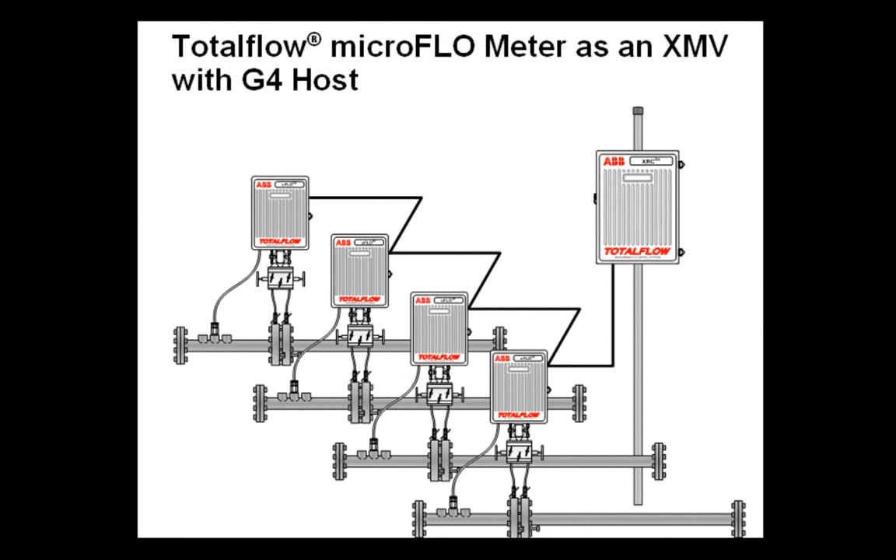Welcome to this instructional video to demonstrate the application of using the ABB microFLO as a remote transmitter, or as we call it, an XMV. In this video we're going to explore the configuration and setup of the microFLO in a multi-tube AGA3 configuration.

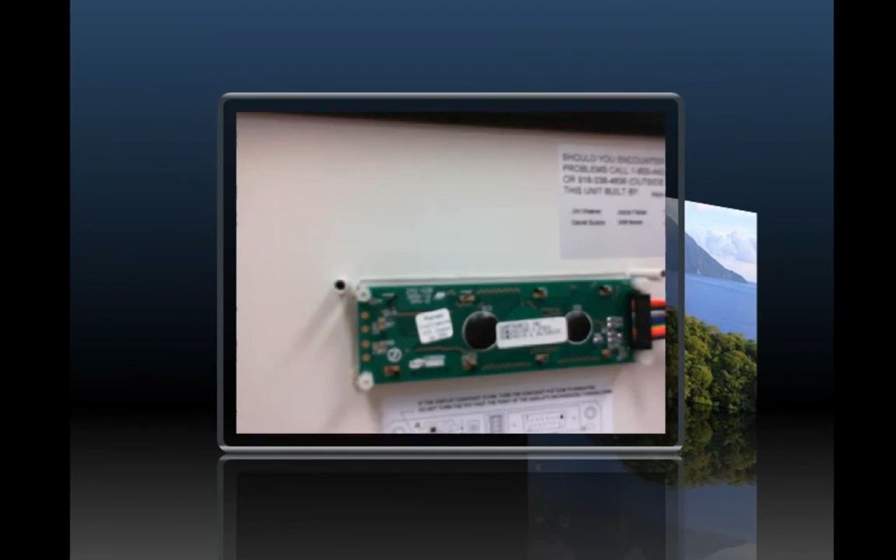Let's take a quick look at an overview of the microFLO hardware. As we open the case, we have a display connected with a ribbon cable to the main board. On the main board we have a daughter card, which can be either RS-485 or RS-232. In our case it'll be an RS-485 board. To the right we'll see the RTD temperature connections. And down below the unit will house our ABB transmitter.

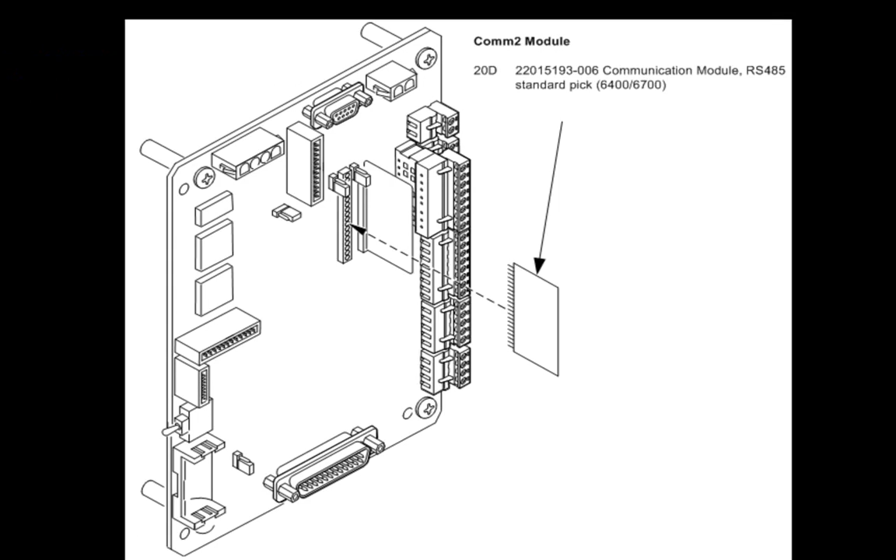Let's first take a look at our hardware requirements for the project. Looking first to the XRC board, the G4, we're going to need to put an RS-485 module in the communication 2 slot on the board. As you can see from the diagram, we can attach the module to the board in this fashion.

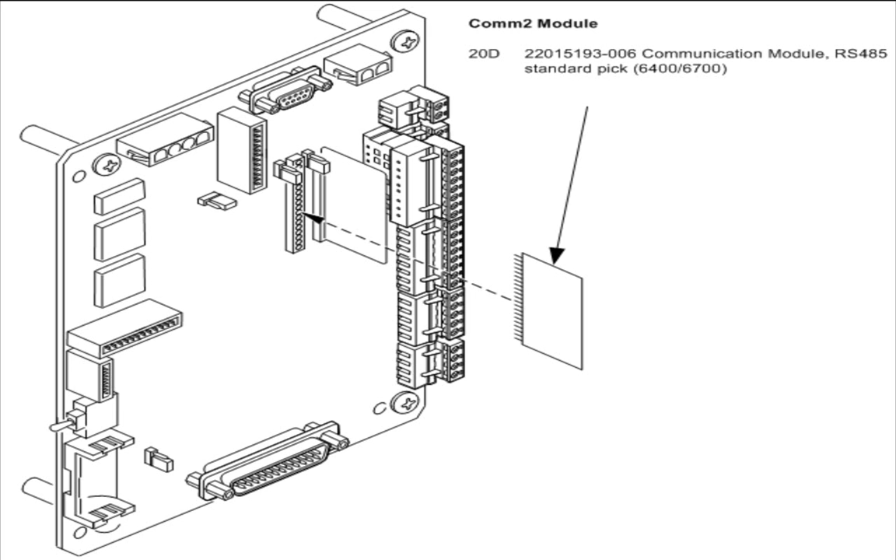Next, let's take a look at the microFLO. We'll of course need the main board, and the daughter card will need to be placed on the main board. As you can see here, we'll need the RS-485 configuration of the board to talk to the XRC G4.

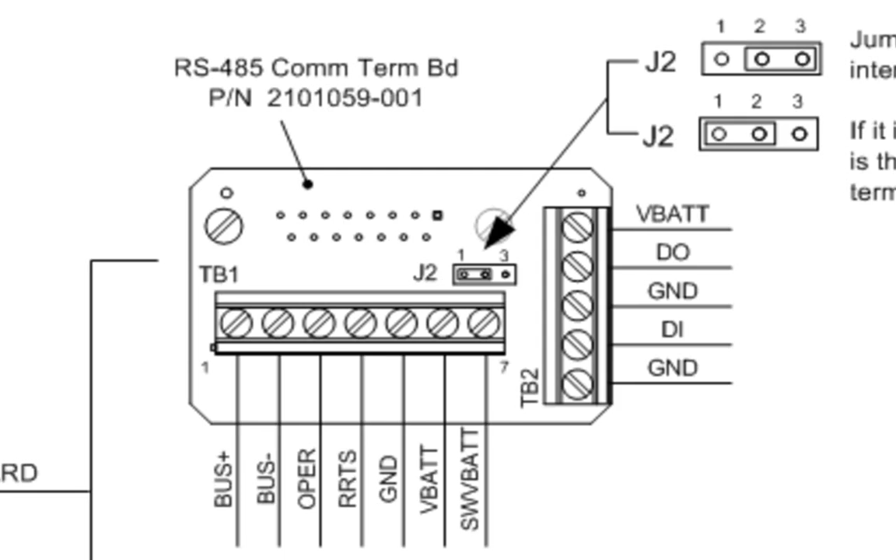And finally, of course, we'll need an interconnecting cable, an RS-485 cable, to connect between, as you can see in the diagram, the main XFC board and the Microflow. We'll need a ground, bus plus, and bus minus.

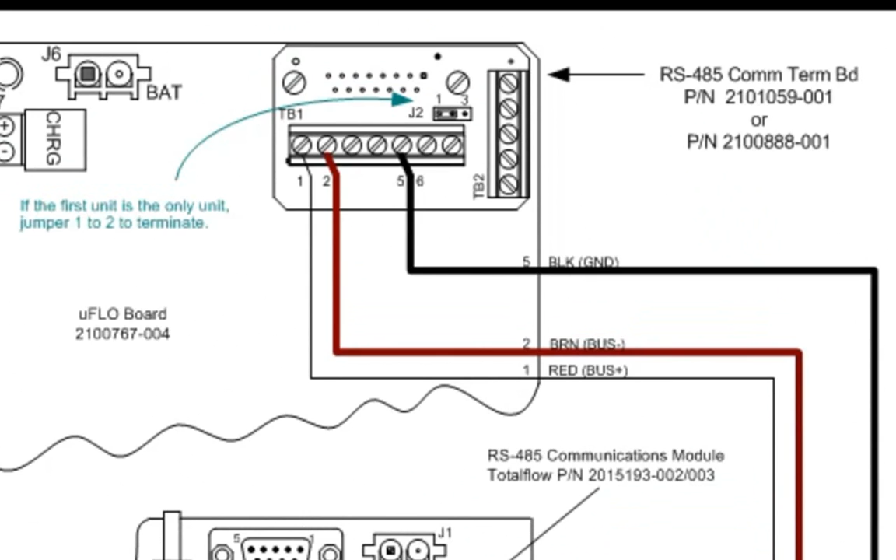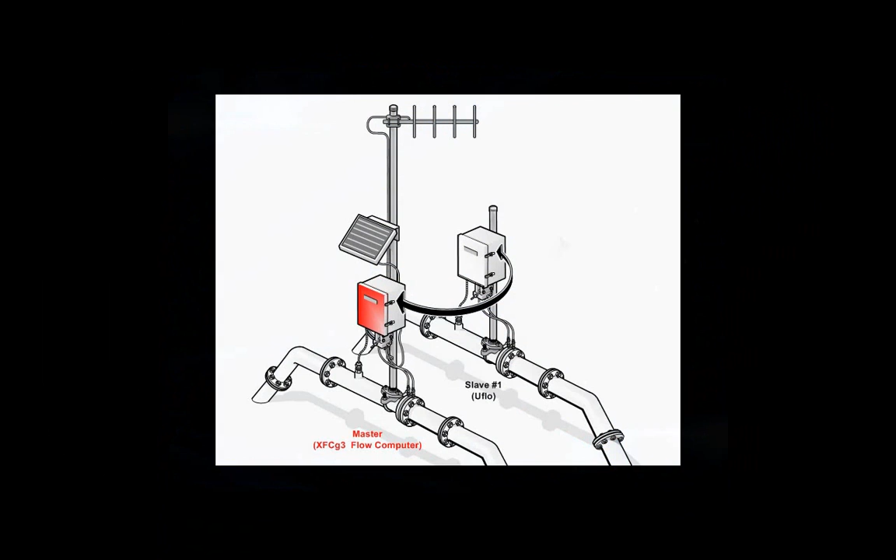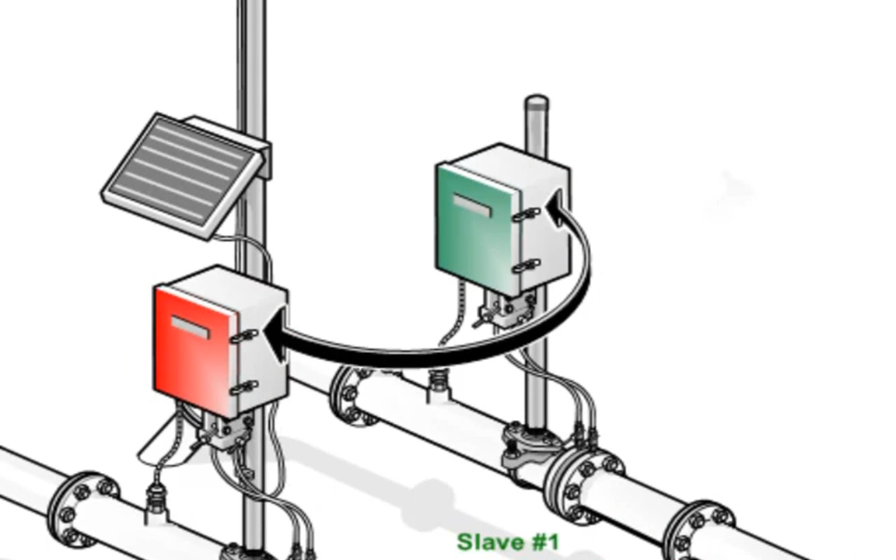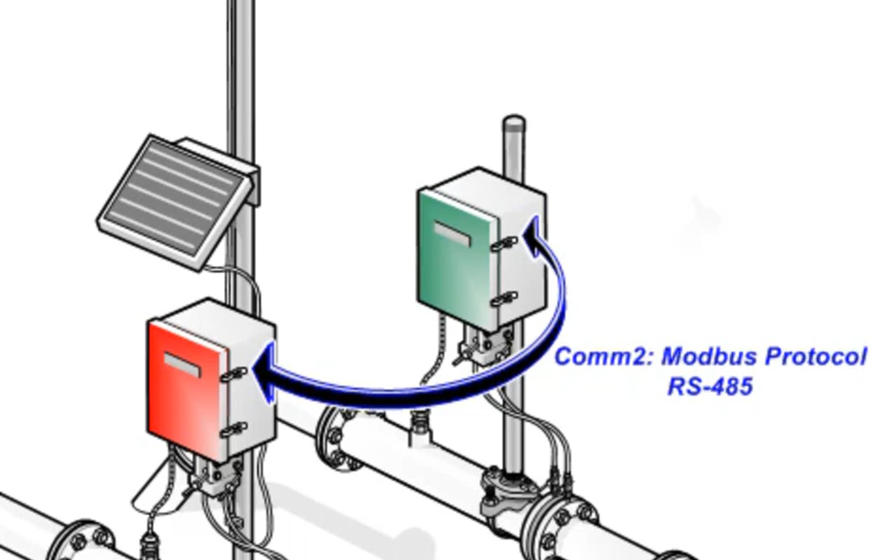As you can see in this diagram, the configuration we will set up today involves one XFC G4 as the master, one Microflow as the slave, and both units will be connected with an RS-485 cable via COM2 on the XFC. The XFC G4 will have two AGA3 measurement applications set up in its configuration and will be responsible for calculating flow and storing data for both AGA3 tubes instantiated in the XFC.

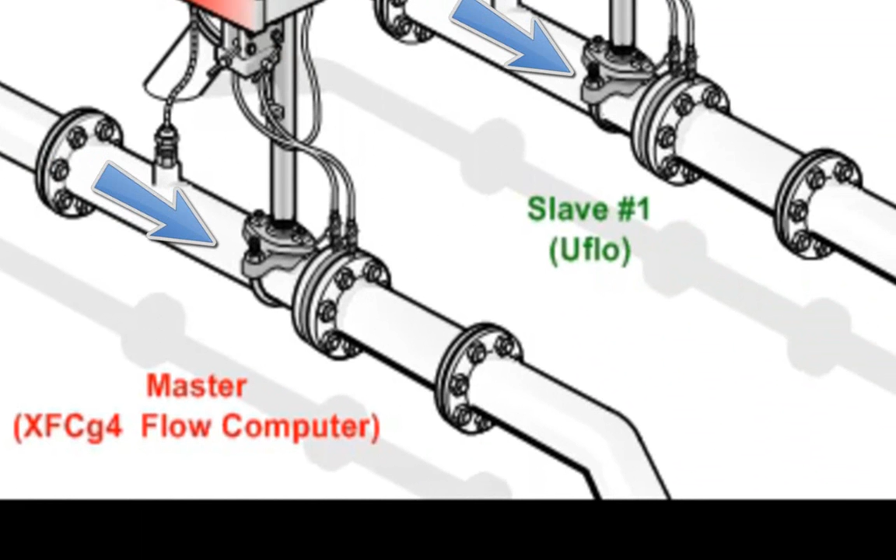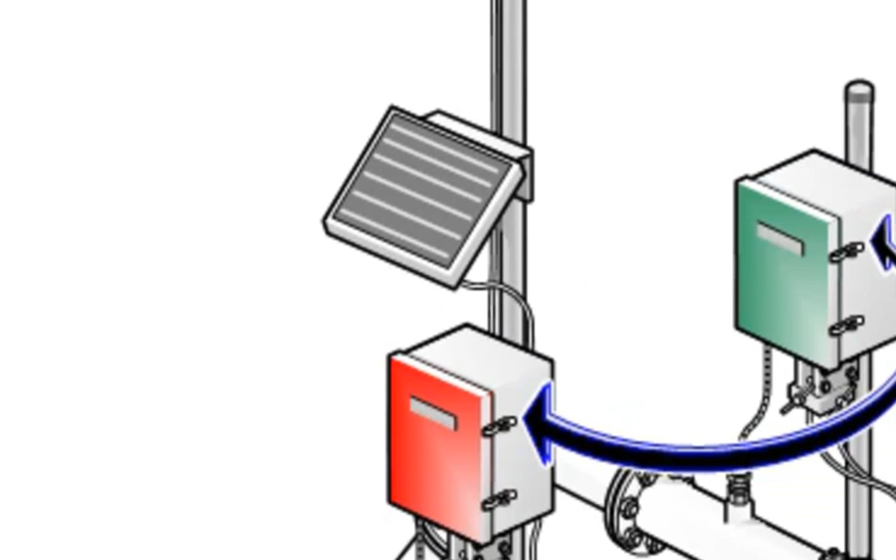The XFC G4 will also supply the 12-volt DC power to the Microflow if there's no power supplied on the Microflow itself. The G4 will also supply display data via the RS-485 link back to the Microflow for its display. The first AGA3 measurement application will get its inputs directly from the XFC's own onboard transducer.

The µFLO will have the singular task of sending live readings of differential pressure, absolute pressure, and temperature to the XFC for the AGA3 measurement tube number 2 calculation. No AGA3 calculations are being performed in the µFLO itself.

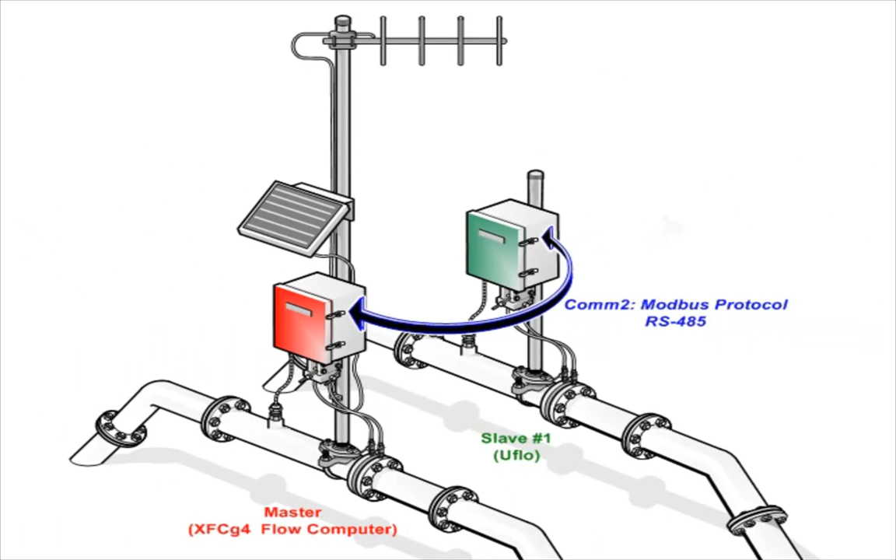As you can see from the diagram, I've got the XFC board on the bottom, and towards the top I have the µFLO represented. We're going to need basically 3 wires: connect a ground between both units, connect bus plus, and connect bus minus.

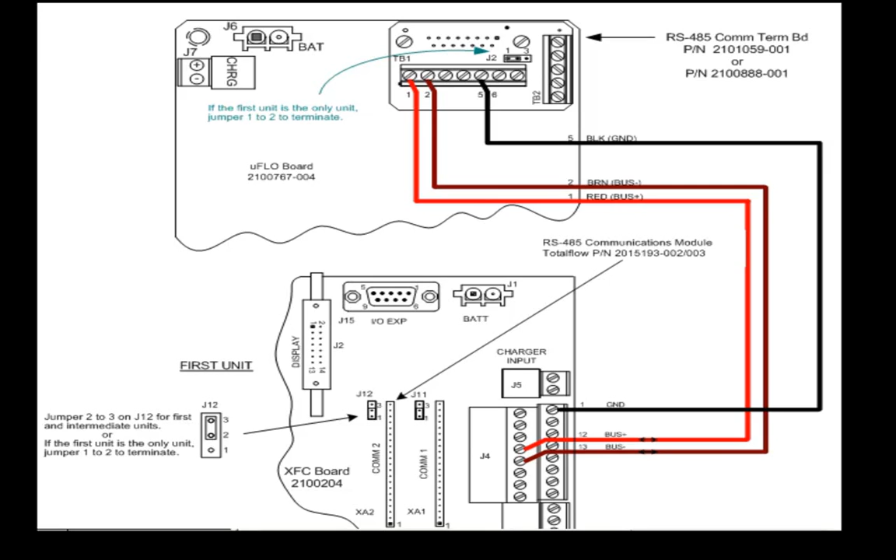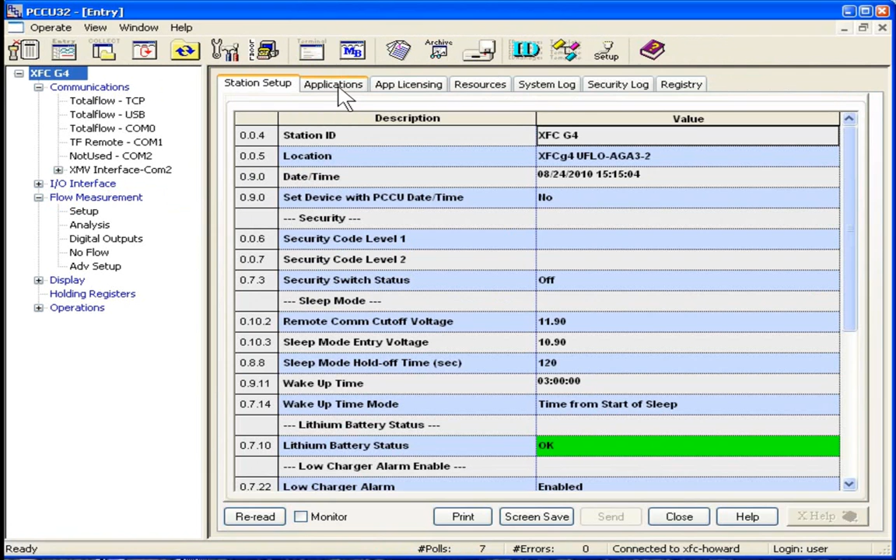Let's start our PCCU configuration with the XFC board. We'll first go in and connect to our board as normal. Go to the top level menu. We need to instantiate another AGA3 application. Go down and turn on another measurement tube, AGA3 measurement tube, in application 12. We'll send that.

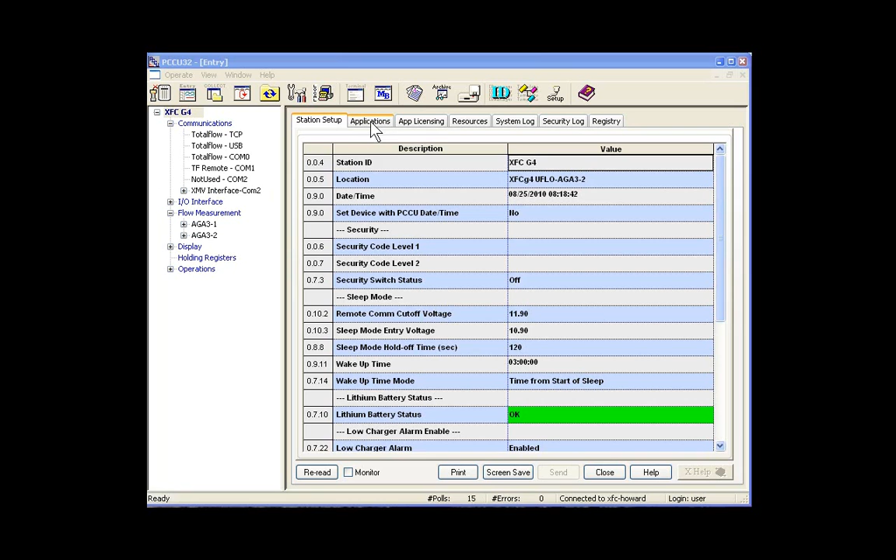Besides the second AGA3 tube, we also need to make sure we have an XMV set up in the G4. As you can see, I already have one set up in this unit, but let's go make sure that I have it in the right place and it's set up properly. Let's go to Applications, go down to 41, and there our application is. So it looks like everything is fine there.

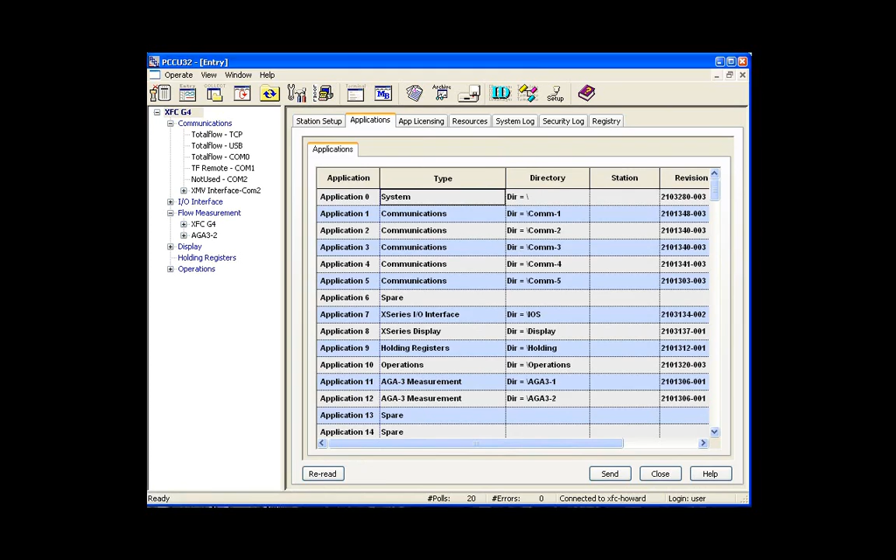Next, let's go in and rename the first AGA3 tube to AGA3-1. Double click on it. Put the name in. Say OK. Next, let's go set up our communication link. We'll go to our XMV interface. Select Communications.

In this area, we'll select how many XMVs we have in our application. In this one, we have just one, so we're just going to leave the one there. The port is COM2. Make sure you have your settings like I do in my setup. And everything should be fine there.

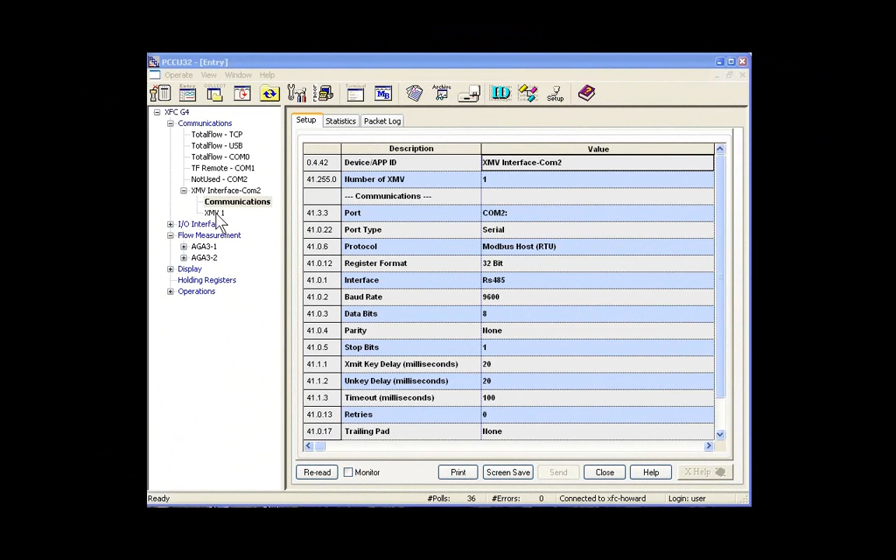Now let's go to the XMV setup screen. We'll select XMV. We'll need the following items set up. Modbus address is 1. Modbus register 21. Scan is enabled. We want English units. The rest of these settings are fine.

Let's go to the Values tab. This is where we actually see our output from the XMV interface. Notice particularly differential pressure, static pressure, and temperature. These are the values that we want to be the source for our AGA3-2 tube, which is our second tube. So let's go there right now and make sure that those are set up correctly.

412050 is our differential. Let's go to the Advanced tab. And if we look over here, we can see that our units are set up correctly in the interface.

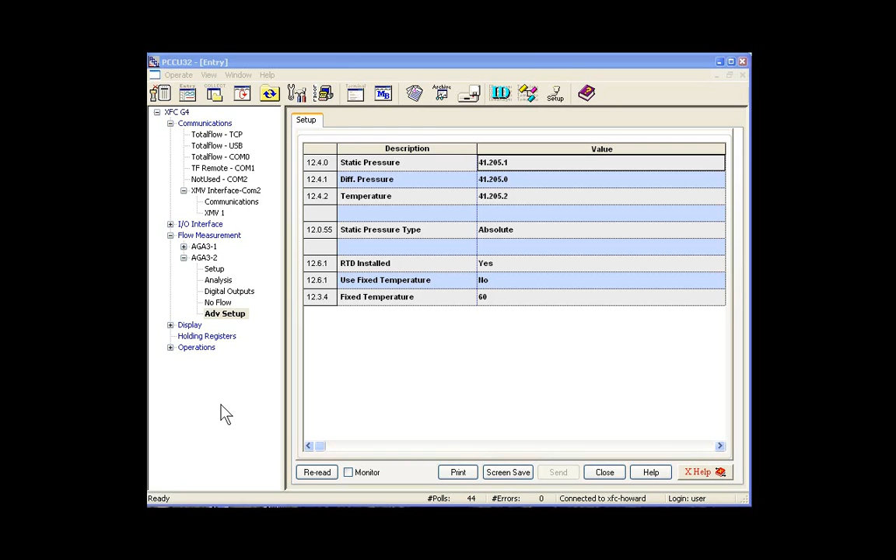The last and final item we need to set up in the XFC is our Modbus file. With this file we are actually going to write multiple registers, the display information and a flow rate, to the Microflow. So let's go to the Save and Restore utility. We look under TF Data, XMV1. There's a Modbus folder there. Our file doesn't exist, so we're going to have to create one.

Let's go up to Operate, File Utilities, Modbus Host Request Block Editor. We want to set up a Modbus function that actually writes multiple registers. Slave address 1 is correct. We're going to start at 8001, and we're going to write 4 different registers. The interval is fine. We're going to do every 2 seconds.

The source registers we need are from our second tube. The first one will be 12.7.0, which is our DP. Second one is 12.3.0. That's our static pressure. The third one is 12.3.3, which is our temperature. And the last one will be our flow rate, 12.7.19.

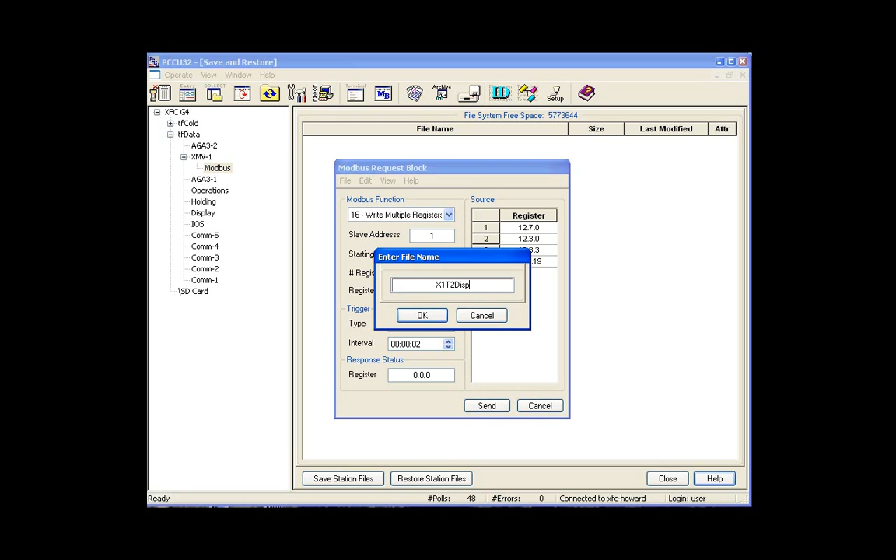Now we'll send this file. It'll ask us for a name, and we're going to call it X1T2DISP. We're going to say OK. As you can see, we've now created the file. Let's double click on it and make sure that everything is fine. Looks like it is. This concludes the setup for the XFC.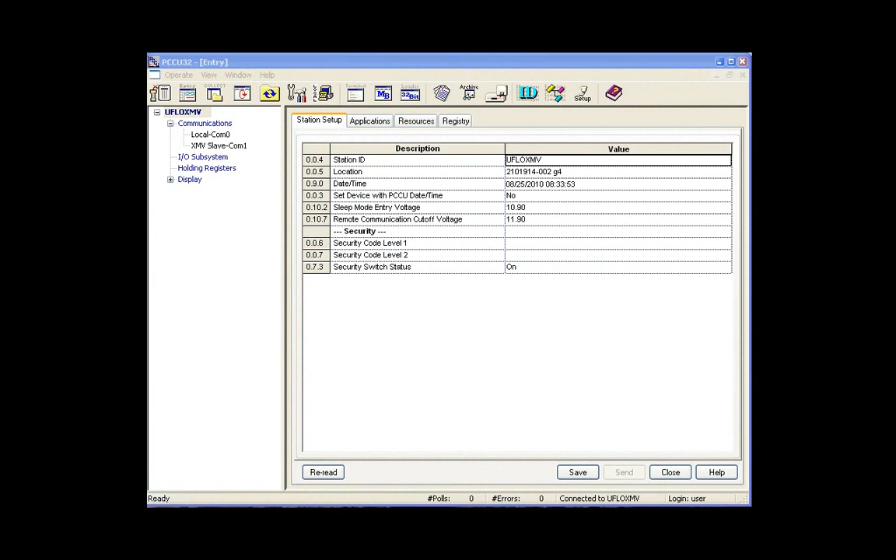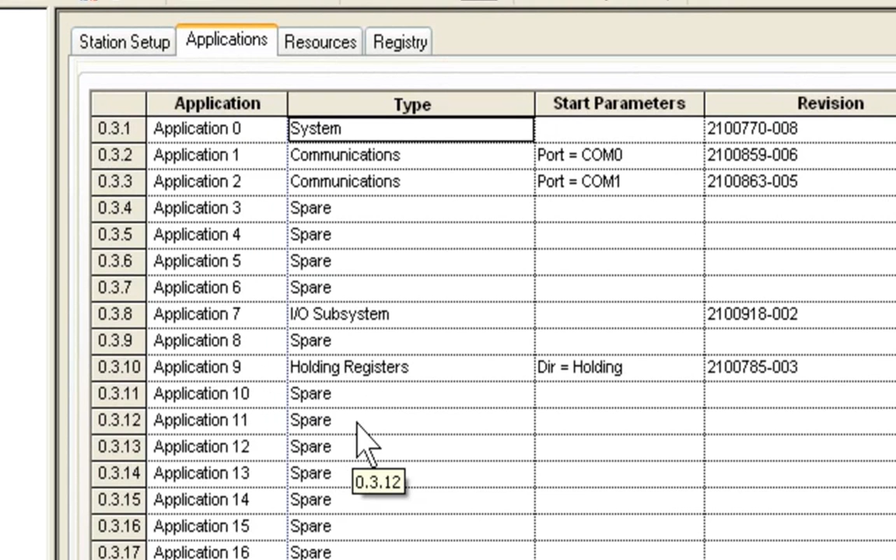Let's begin the Microflow setup by looking at the applications. We'll go to the top menu, select the Applications tab. In this setup, we're going to need to make sure that we have the holding registers at application 9. And also it's normally set up for application 11 to have an AGA3 tube, but I went ahead and spared it out, or actually turned it off, in this application already. If it was already on, you would simply spare it out to turn it off. Those are the two settings we need to make sure we do have.

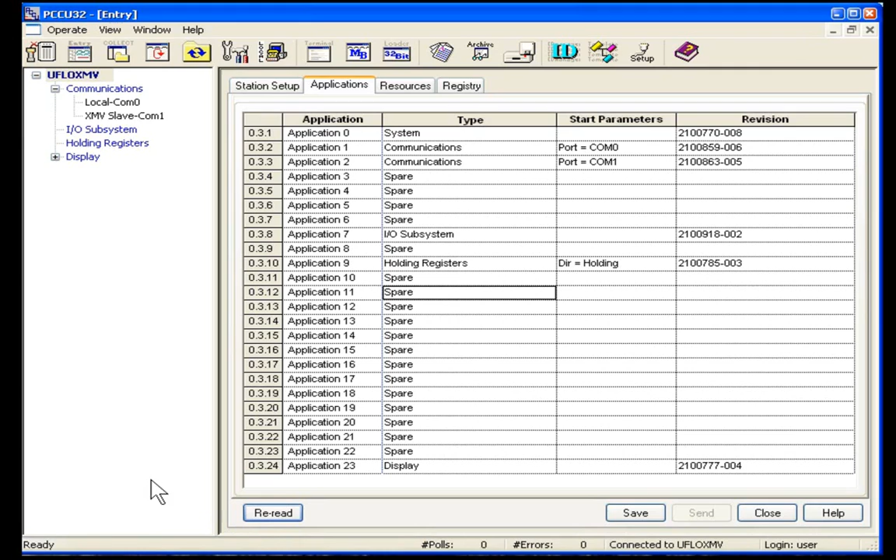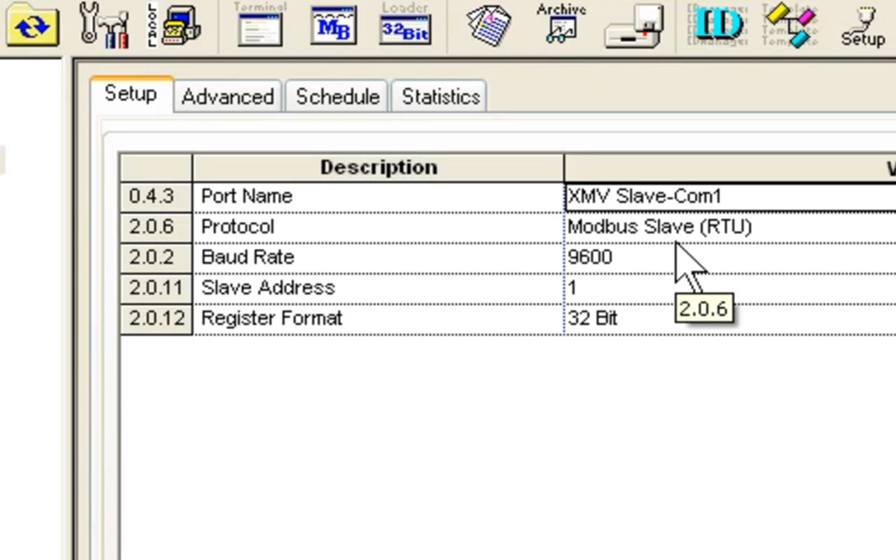So let's send that. Do a reread. Looks like everything's fine there. Next, let's go to our COM port and make sure that we have all our communication settings correct. We'll pick the COM1 XMV slave. On the Setup tab, we'll have 9600, slave address of 1, 32-bit. Our protocol is Modbus slave RTU. That all looks good. Go to the Advanced tab.

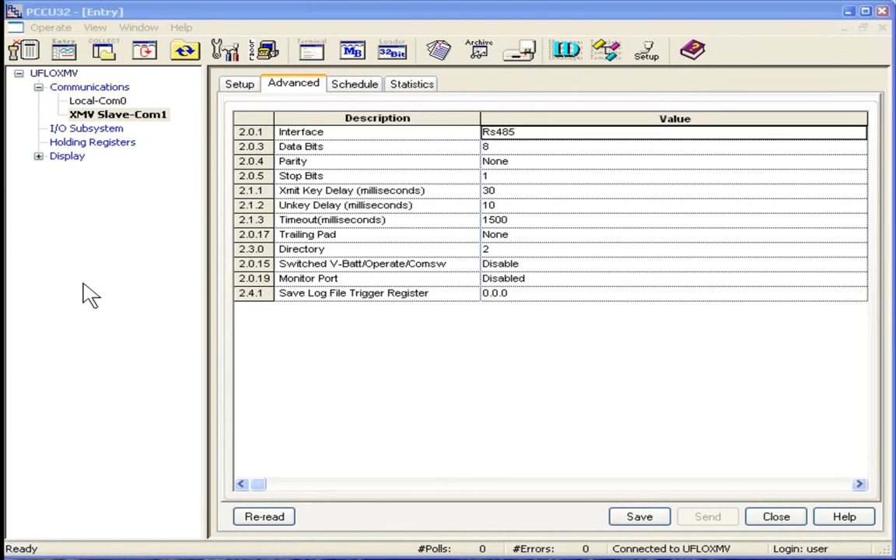RS-485, 8, N, and 1. These settings are okay for the timing. That all looks good. Next, we'll go to our holding registers and make sure that we have that properly set up. In holding registers, we're going to make sure to have 4 floats set up non-persistent. As you can see, I have that set up with descriptors turned on. That is correct.

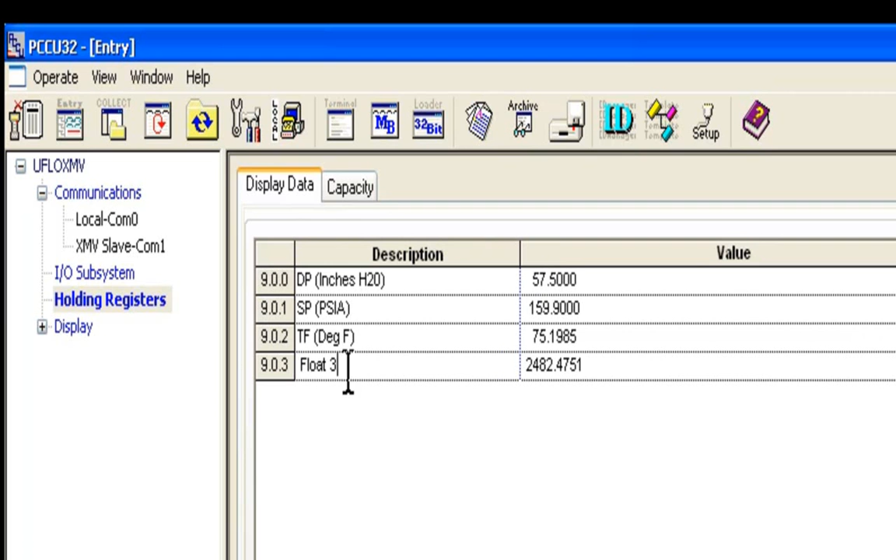So now let's go to the display data. As you can see, I've already labeled 3 of them. Let's go ahead and call this last one flow rate. And send that. Let's do a reread to make sure everything's fine. Looks like it is.

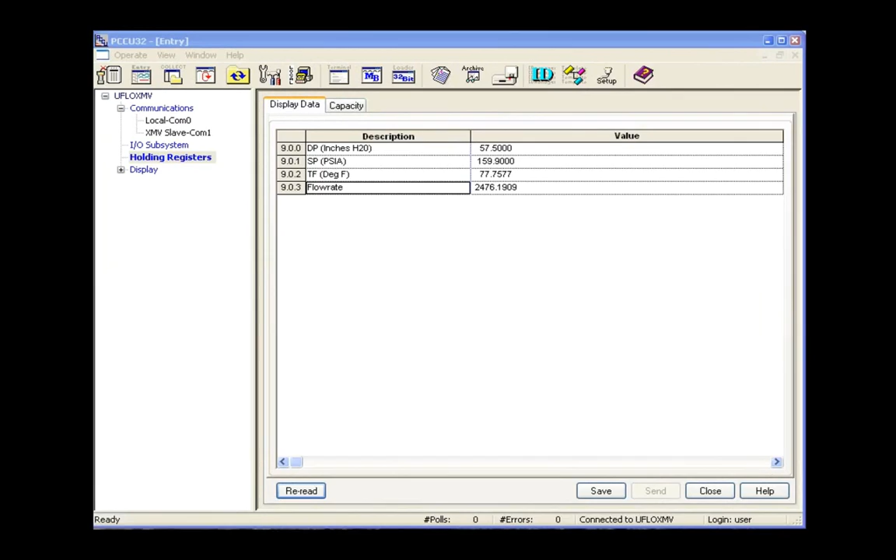Next, we need to set up 2 MRM files, Modbus files, to map one the display information and the other one to map information for the XMV interface. So let's start with the first one for the display information. Let's go to our Save and Restore utility. Let's go to COM1, into our Modbus folder. As you can see, I already have these set up, but let's look at it. Display MRM. I'll double click on that so we can view it.

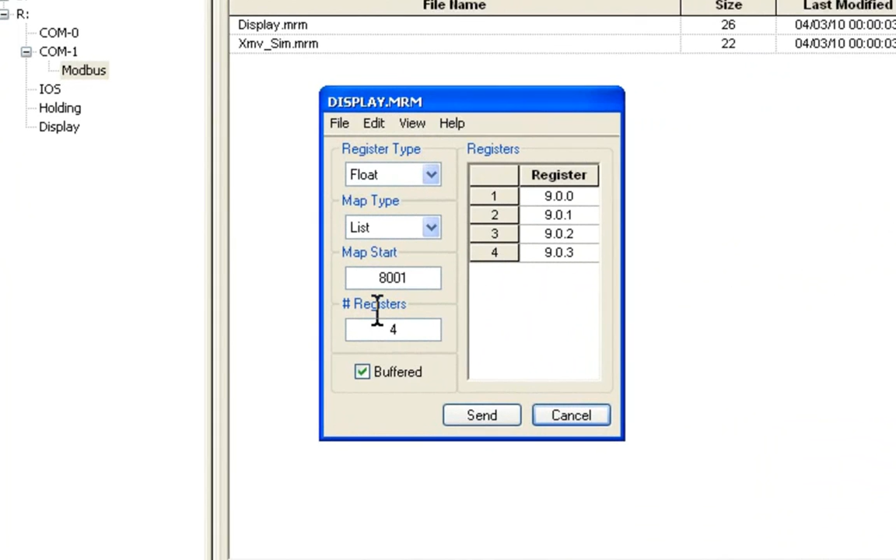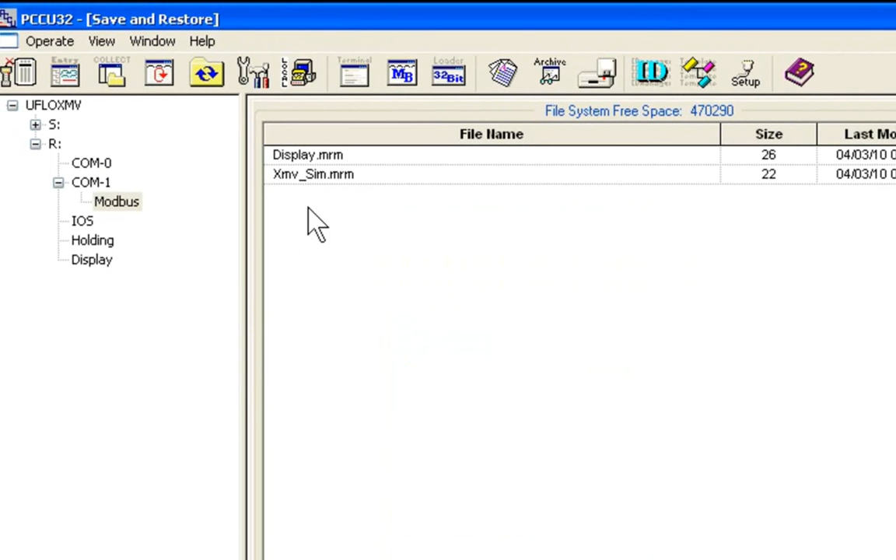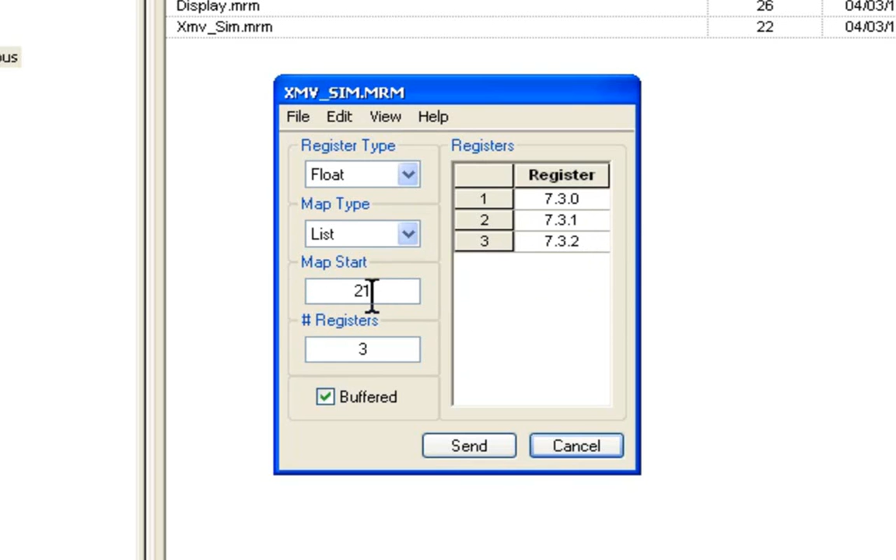As you can see, the same holding registers we mapped right here will be mapped to the 8001 registers. So that's all that is doing. Let's cancel out of that. Let's look at the second one. This file has to do with the mapping of the inputs, pressure, differential, and temperature, to the 21 Modbus map. The XMV interface can look at this 21 register location and obtain these values. So that all looks good as far as the Microflow setup is concerned.

Now that we've correctly set up the XFC and the Microflow and have connected them with the RS-485 communications, let's confirm their AGA measurement tubes are populated with the correct flow data and communication is okay between the XFC and the Microflow. Let's connect up to the XFC. Let's go to the XMV interface. And we can see this screen here. It's usually a good idea to monitor this. As you can see, we have polls and errors. Looks like we have a lot of successful polls. So everything seems to be working fine there.

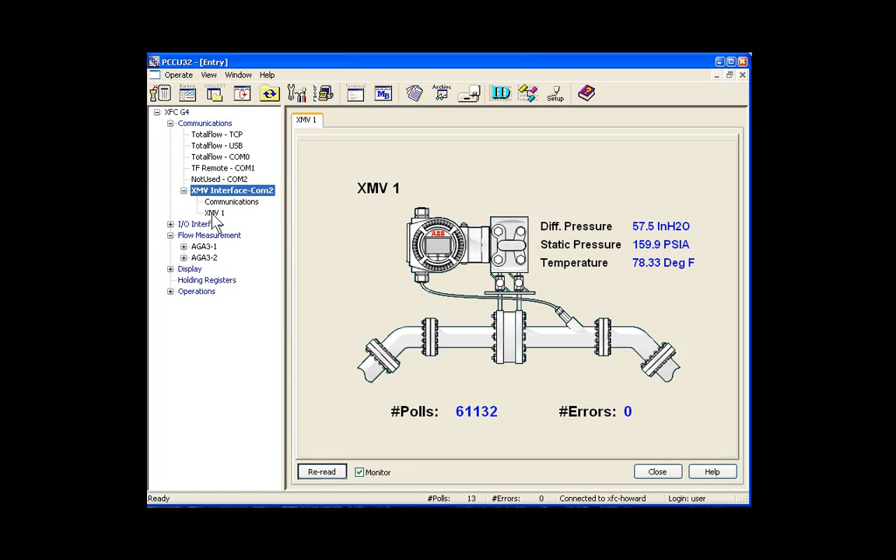Next, let's go underneath XMV interface. Let's go to XMV1. Go to our values. We can reread this or monitor. Make sure we're getting good values here, and we do have success here in the status. Looks like everything's fine.

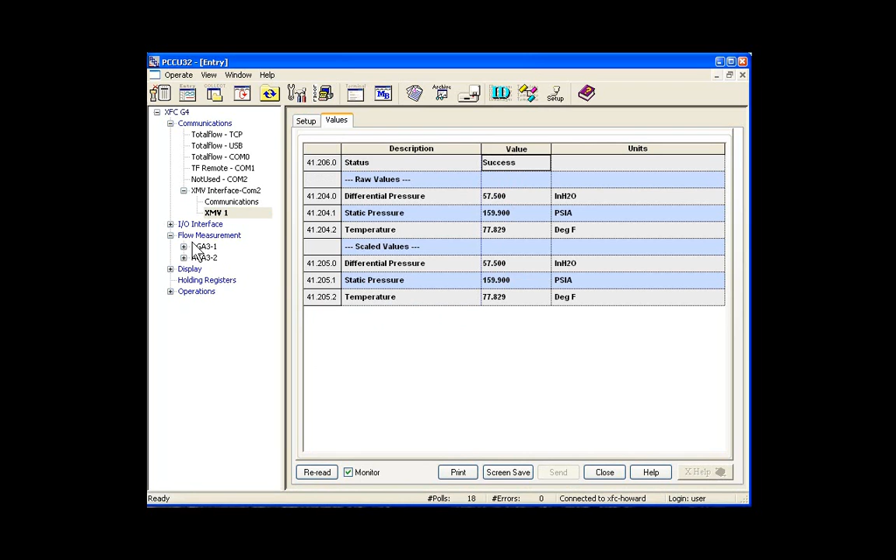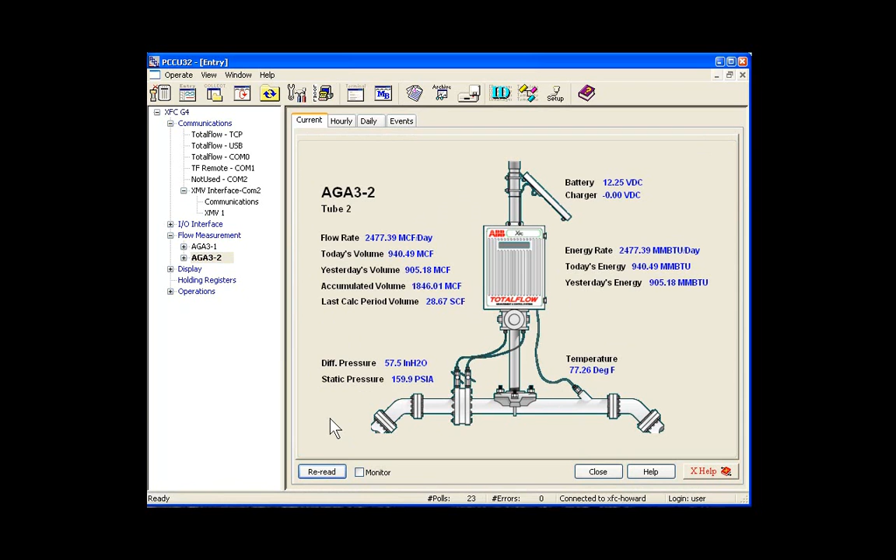Next, let's go to our AGA3 tubes. And we can do the same thing here. We can monitor. Make sure everything's fine with our inputs. Looks like it's okay for the first one. The second one, information coming from the Microflow. Looks like everything is fine there also. So it looks like everything's working properly in our setup. All information is coming in correct and good.